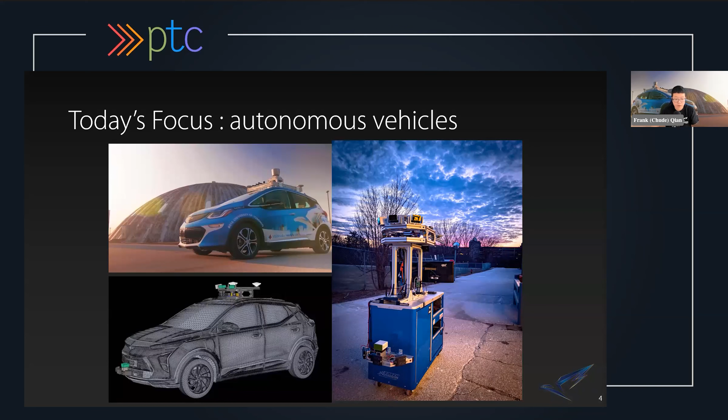So some of the demonstrations are basically based on Waymo's publicly available resources. With that being said, I'd like to talk a little bit about today's agenda. We did the introduction just now, and next I'm going to talk about autonomous vehicles' history, the definition of autonomous vehicles, and some modern day examples of autonomous vehicles.

And then I'll mainly focus a little bit on talking about autonomous vehicle sensing technology - the sensors on the autonomous vehicle. I'll try to touch a little bit on autonomous vehicle software system architecture and the software components, although certain areas do have a slightly higher technical background needed to understand, but I'll try to explain it as much as I can without involving math in the conversation.

And then lastly, I'll talk about where are we in this process, where you'll see so many companies trying to get to level 4 autonomy, and some of them might claim that they have quote unquote full self-driving. So we'll talk a little bit about where we actually are from an academia standpoint in this process.

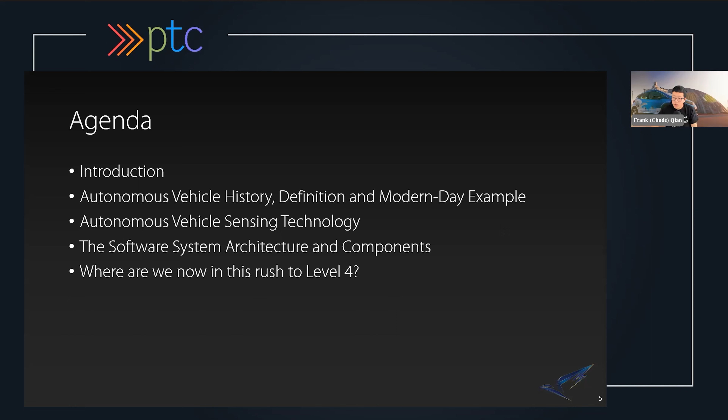So with that being said, let's start with talking a little bit about autonomous vehicles - the history, the definition, and examples.

So in contrary to most people's understanding, autonomous vehicles actually started way back in the early 1980s, where there were a couple of industry pioneers that sort of started the process of developing hands-off autonomous vehicle systems. Namely, in the 1980s, Carnegie Mellon University developed a vehicle platform called NavLab, which is the leftmost vehicle. It's modified from, I think, a minivan. The vehicle actually performed only one task at the time, and it was already a huge groundbreaker.

What it does is basically keep the vehicle within the two lanes - that's all it does. Compared to modern day technology, if you've bought a car in recent years, it's sold with the feature of lane keep assist, basically. And it's also, if I recall correctly, a single agent system.

What that means is it assumes there's no other road agents such as vehicles or pedestrians. It's only by itself, and all it does is keep within the lane. But mind you, this was in the 1980s, so back then computers were not as powerful as modern day computers.

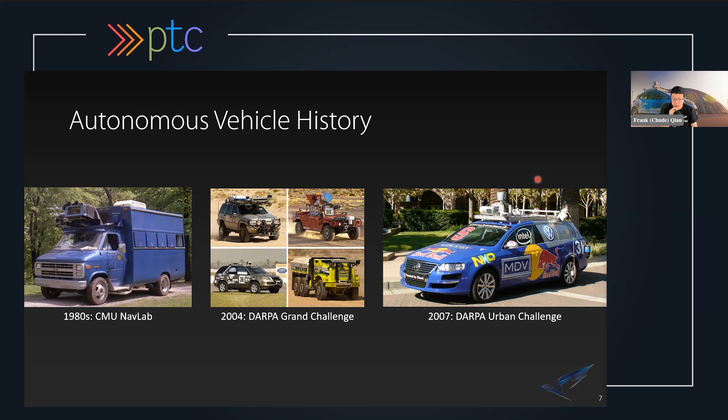That brings us to 2012, where Google Project X started publicly testing their autonomous vehicle project, although development actually started right after the DARPA Urban Challenge. So the DARPA Urban Challenge, in certain people's minds including mine, is sort of the ground zero of modern day autonomous vehicle development. And in 2018, Waymo becomes the first company among a few others to start publicly testing the concept of an autonomous rideshare system in certain areas.

This operates under an operation design domain - I'll talk about that concept a little bit later. But in a specific area, I think Phoenix, Arizona, they tested their systems and allowed users to ride in their vehicles with a safety driver in the seat.

In the same year, something super unfortunate happened in the US, which is the first fatality accident on a level 4 autonomous vehicle. The vehicle was owned by Uber ATG. This also became a turning point in the discussion, shifting from just building an autonomous vehicle quicker to win the arms race, to more reflection on safety of autonomous vehicles.

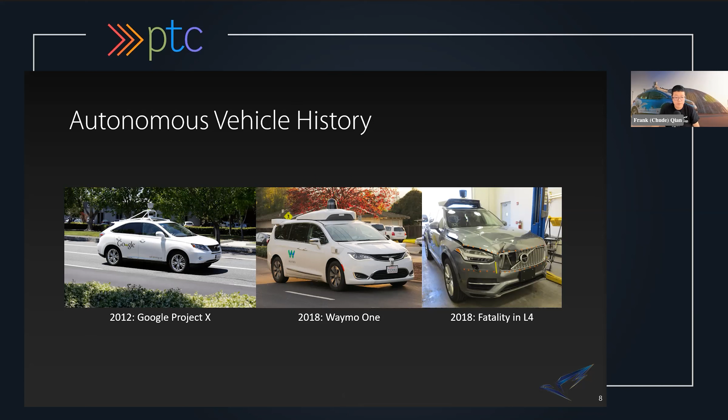So I mentioned the term level 4. This level is actually a definition of autonomous vehicle autonomy by SAE International. I think it's a Society of Automotive Engineers, which is like a governing organization on automotive engineering. So they define 6 levels of autonomy in a vehicle.

For level 0 to level 2, on a very high level summary, as a driver you still need to pay 100% attention on the road, and you have to constantly supervise the vehicle. You cannot zone out, or I would say not drive the car for a prolonged period. The car in level 2 might have features such as providing steering and brake/acceleration support, such as following in a traffic jam with stop-and-go features, or lane centering features which keep your car in the center of the lane.

So a keyword you might hear if you buy a vehicle recently, for an add-on feature, is called adaptive cruise control. Level 2 is also very popular these days. Most auto manufacturers, such as Toyota, Volvo, or BMW, claim they have level 2 features, although their performance varies drastically.

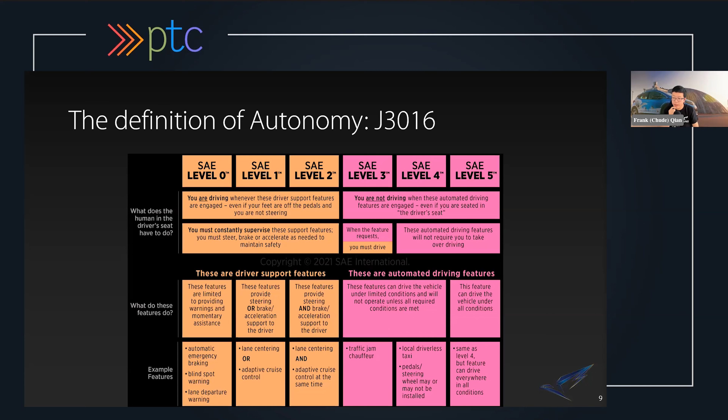Obviously, you cannot just stop on a highway. So the degradation is a broad term for exiting the autonomous vehicle mode. For level 5, the goal everyone is trying to reach, it envisions full autonomy capability, and the conditions bounded for level 4 autonomy are lifted. You can drive, or in other words the car can take you anywhere you want without any hiccups, or even if there's a hiccup, the car can handle it itself. That's the definition of the SAE level of autonomy, the J3016 standard.

For modern day autonomous vehicles, or more specifically modern day autonomous rideshare systems, there are a couple of big players. Waymo, formerly known as Google Project X, was the first to start. They started in Phoenix, Arizona, and I think they have now moved further to San Francisco, California, and a couple other regions for small-scale testing.

Two new players have risen up in recent years: Apollo, a company from China under Baidu, and Cruise under General Motors. Both of them started publicly offering rideshare in a given geographical region earlier this year. If you look very closely, you'll notice the Cruise car is also based on a 2017 Bolt EV, similar to what we have for our Zeus vehicles. So there are a couple of things in common, and a handful of things that are totally different, comparatively speaking.

Another question that has to be addressed when talking about autonomous vehicles is: why autonomous driving? Why would we want to give up the fun, in some people's minds, of driving to autonomy systems? It turns out there are actually multiple studies that back this theory: autonomous driving can further improve road safety. If the implementation is done right, the reaction time for an autonomous vehicle is much faster compared to a human driver. It can also increase productivity.

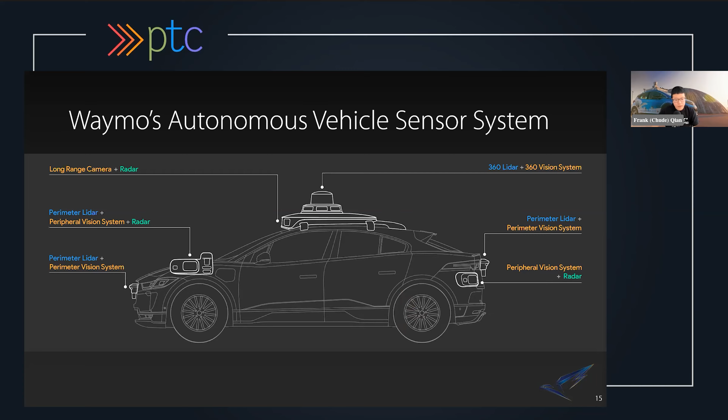So we've seen the impressive one. Let's talk about some of our design. Keep in mind that the vehicle system we design is participating in a challenge similar to the Darpa challenge. It's called SAE Auto Drive Challenge. Basically, 10 universities built their autonomous vehicles, and then we tested at University of Michigan's M-City Proving Ground to validate our vehicle's capability.

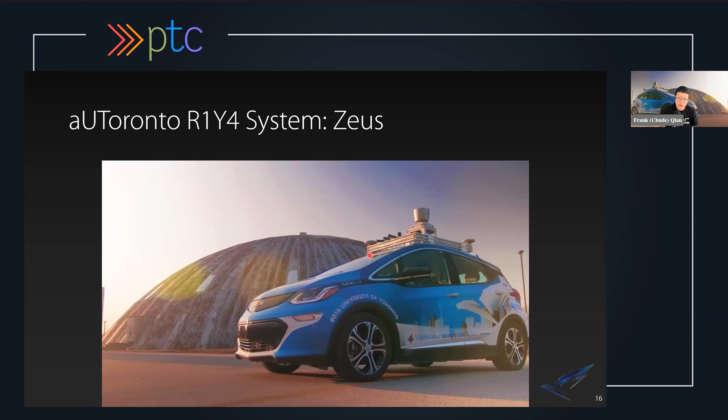It's a subset of a full autonomous driving problem, as you will see in a couple slides later. What we have is only a sensor system on top of the rack. If you pay close attention to the next slide, our sensor system actually mainly focuses on the front. We don't necessarily perform 360-degree surrounding coverage on our vehicle, since the competition is a single agent competition, meaning you're the only one driving on the road, and the interaction of your vehicle compared to other road agents is minimal. So that's how we can get away with our design.

It ties into the discussion of ODD, Operation Design Domain, which I will formally define a bit later in the slides.

So our Zeus vehicle system has an Applanix GNSS INS system, a Velodyne HDL64E Lidar, which for this one, most of the autonomous vehicles you see in 2018, 2019 have that. It's sort of a standard design. And then we have a handful of cameras providing coverage there. Note that we actually don't use radar on this version of the design.

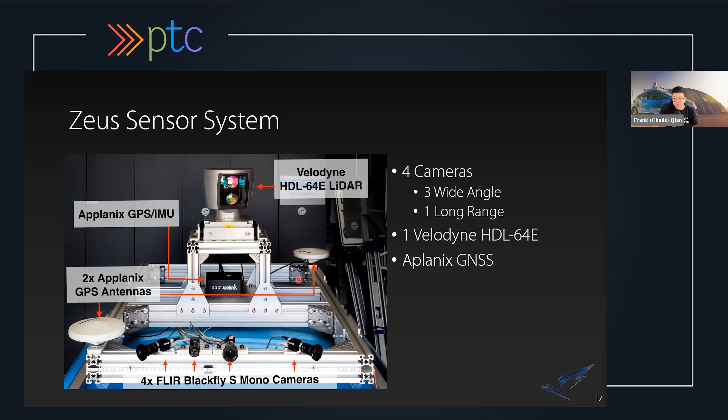Fast forward to this year - this competition runs on a 4-year per round cycle. So this year marks a new round of the competition, and there are some new rules implemented. For lidars, we have to use Cepton's micro motion technology lidar, so we no longer use a giant 360-degree lidar. This is our test and validation system we designed over the past year, and it has achieved very good results for the competition.

The system utilizes 3 lidars on top to provide similar coverage looking in front of the vehicle, the same GNSS INS unit on the rooftop, and a similar but more compact configuration with 4 cameras - 3 wide angle and 1 long range. For our radar, we have 3 radars providing coverage on the bumper area, since you don't necessarily have to mount your radar very high, at least for the brand we got. We also put another additional lidar on the bumper to again minimize the blind spot.

Keep in mind that this design is also under budget, and what we are doing here is a minimal viable design - basically a design system with the smallest amount of money that can provide the maximum performance. So this is what we had for this year. It's not on the autonomous vehicle or a car, it's just on a push cart as a test platform.

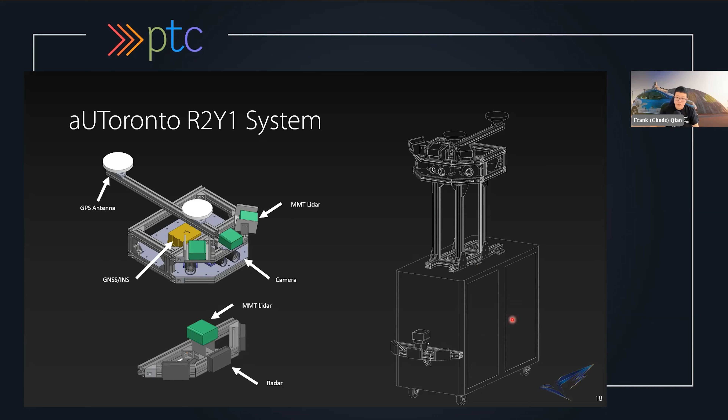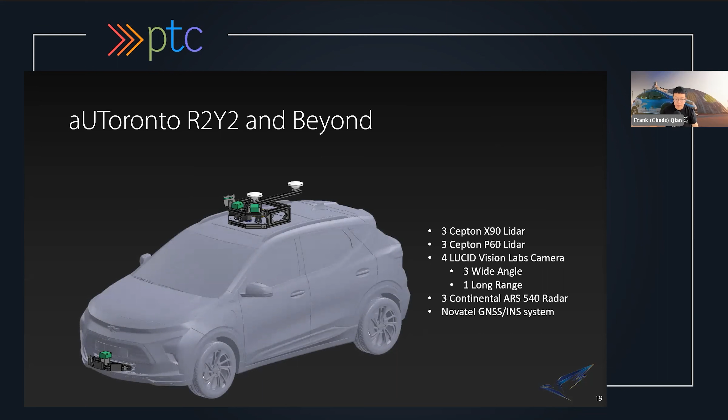So what are we going to do next? This is actually probably one of the first times we've shown this publicly. This is our design for next year's competition, where we'll feature more lidars to provide more coverage and minimize more blind spots. We'll use 6 lidars in total, 4 cameras, 3 radars, plus a GNSS INS system on the vehicle to provide about a full 180-degree coverage in the front. If you look at the two slides, you can see the design is pretty much transferable.

Let's take a look at the sensing technologies one by one. Most of you probably already know what cameras look like. You can actually see objects and recognize what they are very easily through a camera. The technology is very mature.

So with cameras, you're able to tell what an object is or what type of object it is very easily. However, you cannot easily tell how far away an object is from you, because it's a sort of 2-dimensional sensing technology.

Obviously, Tesla has more cameras, more data. So you can, technically speaking, infer depth out of the cameras, but you have to have a large amount of data samples as they do. That's a different discussion in academia where it's called monocular depth estimation.

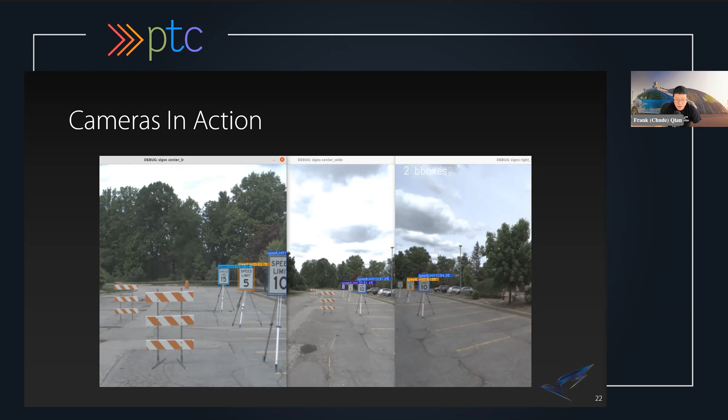Back then, a very popular modality of LiDAR is called a spinning LiDAR - there wasn't an actual academia name, it's just what we previously used. I usually call them spinning LiDAR, which involves a mechanical component that spins around. How LiDAR works is basically it shoots out a laser that gets bounced by a movable mirror, so you can change the reflection where you want it to shoot toward. It shoots on an object, and then the laser returns back to the mirror and onto a receiver. Through how long you shoot out this laser beam, and how long it took to travel and bounce back to the receiver, you can very easily tell how far away an object is, and that becomes a point on a point cloud.

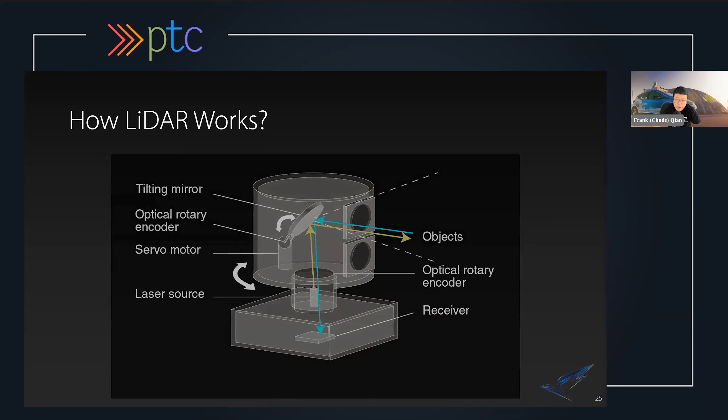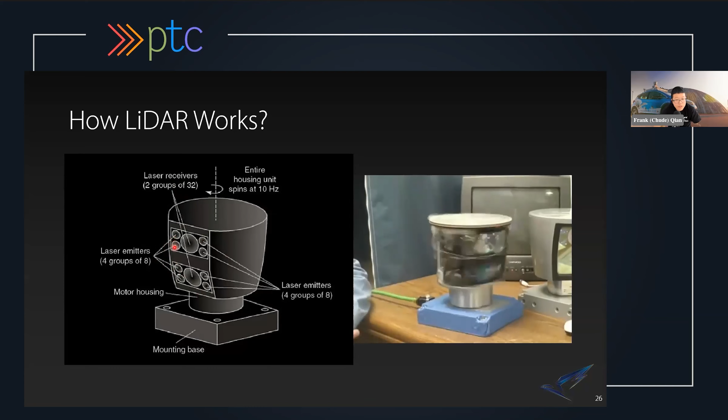So this is another example of LiDAR on my virtual background, you can see there. This is how a Velodyne 64 LiDAR works. It's actually quite an engineering marvel. As you can see, it basically spins to provide 360 degrees surround view. It uses 4 groups of 8 laser emitters and 2 large receivers to receive the points, and it spins on top of the vehicle, providing 360 degree LiDAR coverage. This was for a long period of time the standardized industry standard for LiDARs.

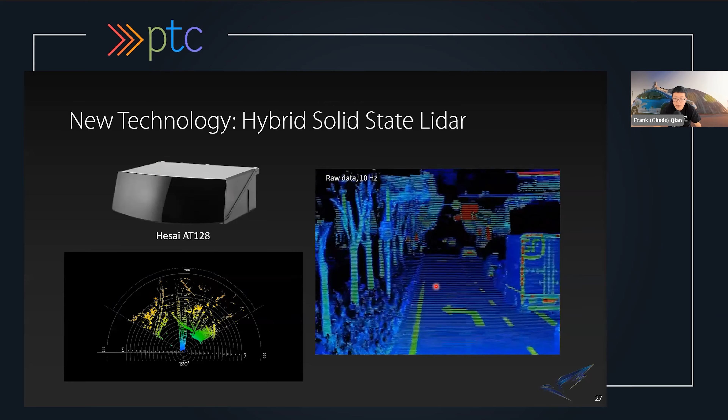However, as you can probably tell, there's a lot of moving mechanical components involved in these LiDARs. So more modern day LiDAR systems involve something called solid state LiDAR. A very popular brand these days is Hesai's AT128 LiDAR. In fact, a couple of car manufacturers already integrated their LiDAR system onto the vehicle, so it's one singular unit. What they have is a MEMS chip to shoot out the laser and receive it, so there are no more major mechanical moving parts that can fatigue over a long period of time. It's more preferred by automotive applications.

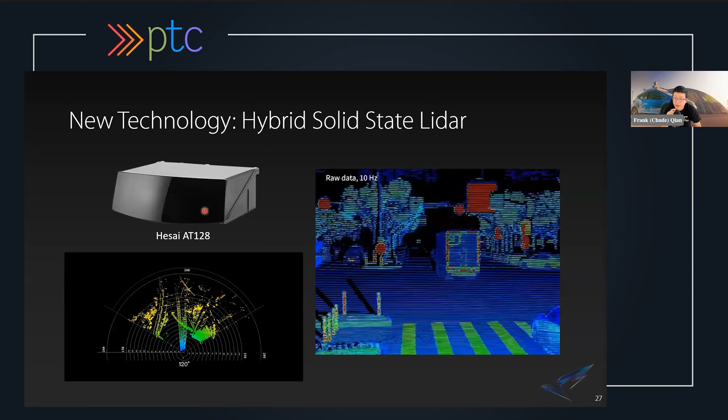For us, what we use this year is a different LiDAR technology called micromirror technology, in which the LiDAR has some mirrors inside that vibrate. You can see it produces decent enough coverage for objects, but it has this very interesting grid-like pattern. That's a very unique characteristic of micromirror technology, at least in this day and age, by Hesai.

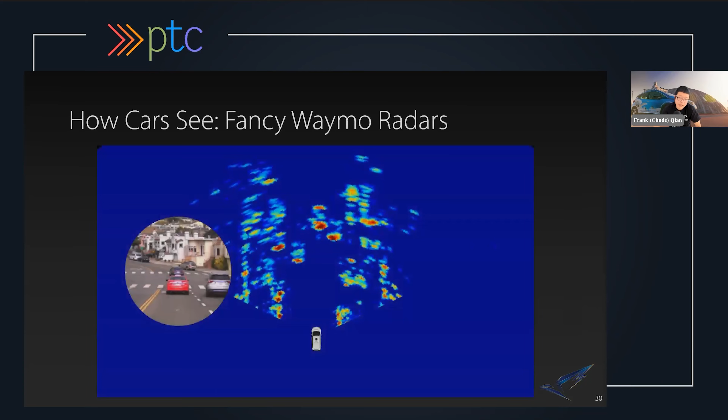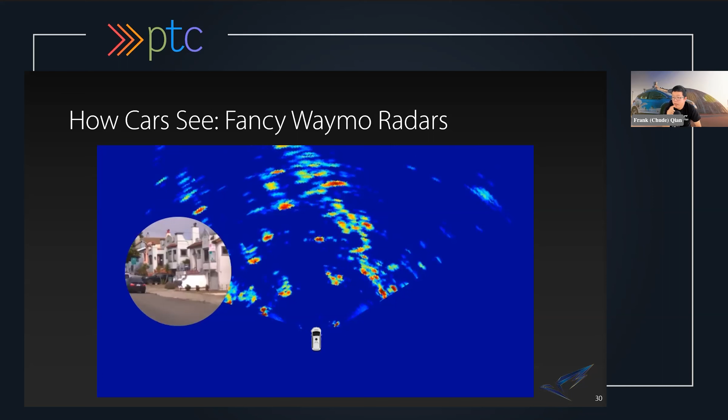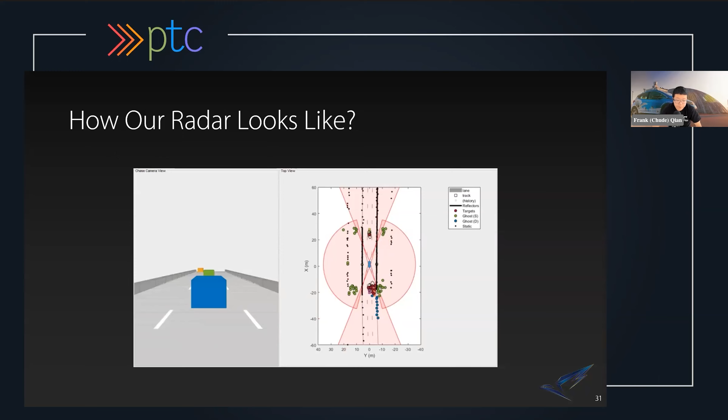With radar, the advantage is that you get back the object's velocity directly alongside their position information. Each of these dots actually contains velocity information that you can read on our radar system. So how does that work? It's actually very deep mathematics, but you can very easily understand it.

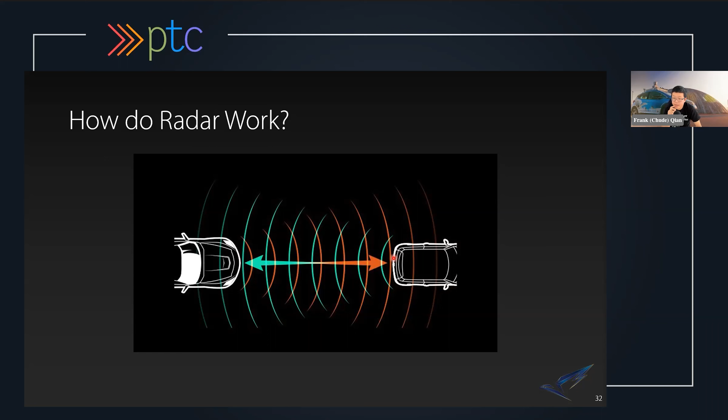You shoot out, similar to LiDAR, a radar 77 gigahertz beam, and when it hits an object, it bounces back. However, if an object is moving, the frequency will change, and through that frequency shift, the Doppler effect, you can infer the vehicle's velocity. Think of it like standing on a street when a police car with sirens drives fast next to you - you'll hear the tone shift a little bit. That's basically, on a very rudimentary level, the similar idea of how automotive radar gets velocity information. It looks at the frequency shift.

So for some of you, if you follow technology, those are very standardized sensing technologies that has been out there since early 2014, 2013 even. Next, I'll show you a little bit of the bleeding edge technology of the sensors.

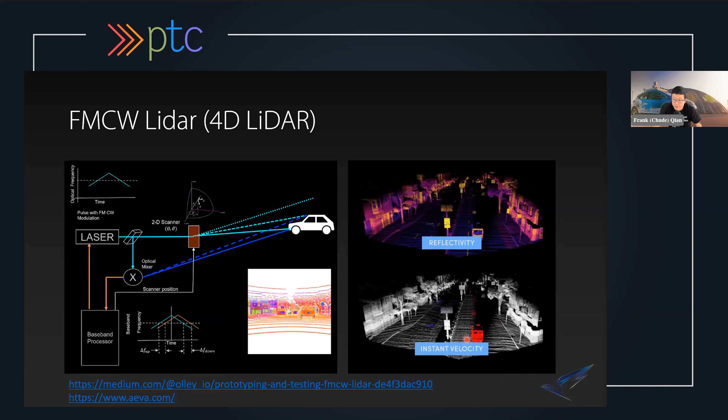So why don't we combine the two? It turns out you can actually also use laser to look at a very broad scope of frequency shift in the laser space, and you're able to get both the good point clouds as well as the velocity information of each point, which is super nice.

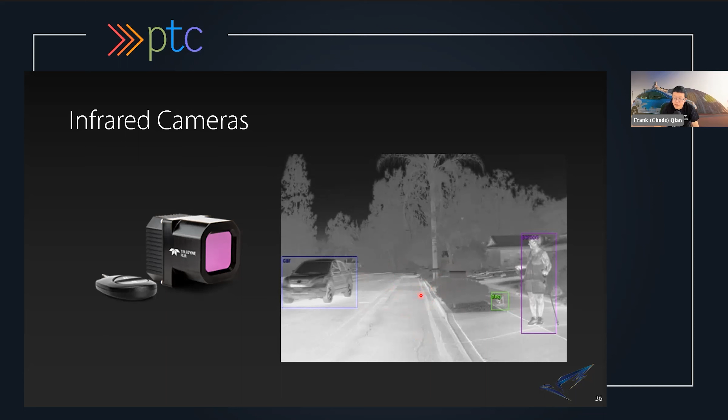Another technology that hasn't really been put onto autonomous vehicles due to import and export restrictions is infrared cameras, because the military still uses some of these technologies. But it also allows you to see objects very well at night, especially handling animals that jump out at the side of the road. So we're hopeful that this technology can get opened up a little bit more, and more vehicles can have that.

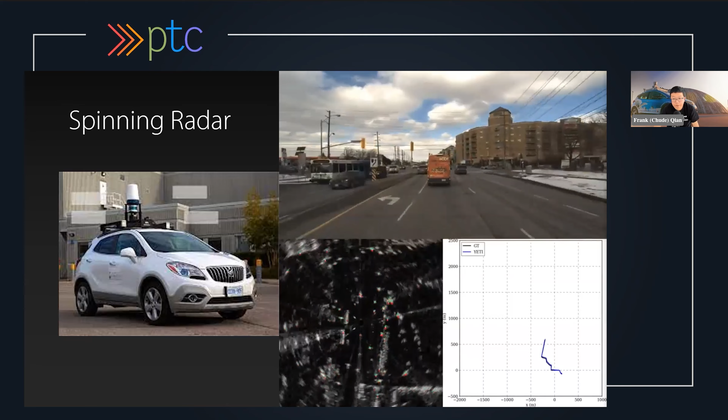So when talking about designing a sensor suite for an autonomous vehicle, another very important aspect you need to think about is sensor coverage. Waymo has full 360 coverage, nooks and crannies around the vehicle. For our vehicle, Zeus, we have 360-degree coverage introduced by Lidar. Our camera only covers the front 180. We did attempt to put radar on there, but eventually we didn't use that.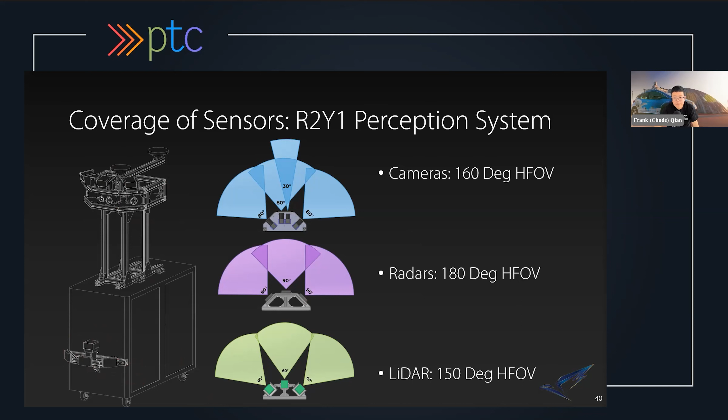So how can we get away with only having that little sensor compared to Waymo's design? Well, I have to introduce the concept of operation design domain. Basically, operation design domain defines a set of operation areas that your vehicle is expected to handle and operate in. For our scenario, it's very simple.

It's based on whatever the competition gives us. All we need to do is drive within the lane, detect traffic lights, handle pedestrians crossing the crosswalk—there's only one pedestrian expected at a given time—and handle deer jumping out onto the road in front of our vehicle. So that is our operation design domain.

And in here, you can see, as I previously mentioned, that for actual autonomous vehicle companies, there's also a geographical fence idea where Phoenix, Arizona was the first area validated because it's most likely always sunny there. Although Waymo nowadays has also expanded their weather coverage to pretty much everything, a safe approach is to define your operation design domain and then validate it rigorously, and then slowly expand your operation domain.

So that's why we get away with what we have, and that's a very important concept in autonomous vehicles. In the upcoming years, you will see cars selling autonomous driving features, but they only support certain areas of a geographical region, bounded by the operation design domain. Some cars might not work under rainy weather or snowy weather. So that's a very important thing to look out for.

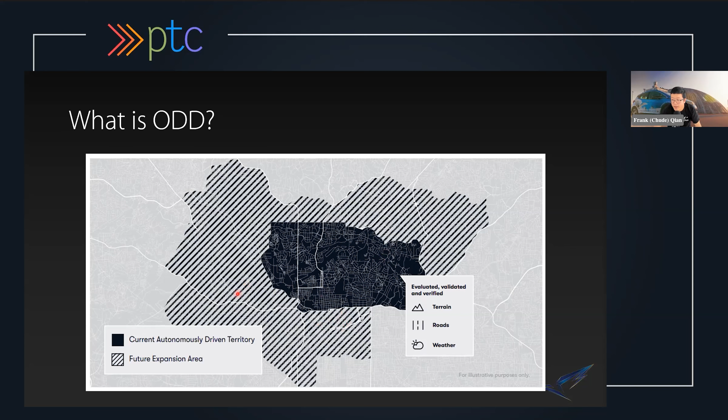Next, let's talk a little bit about designing the system architecture of an autonomous vehicle, or what I call an old school autonomous vehicle. These are the components in it.

Modern day autonomous vehicles are more complex or have more variations, such as machine learning end-to-end. That's what Tesla does. Or some more rigorous component-level machine learning that basically treats the system as a black box.

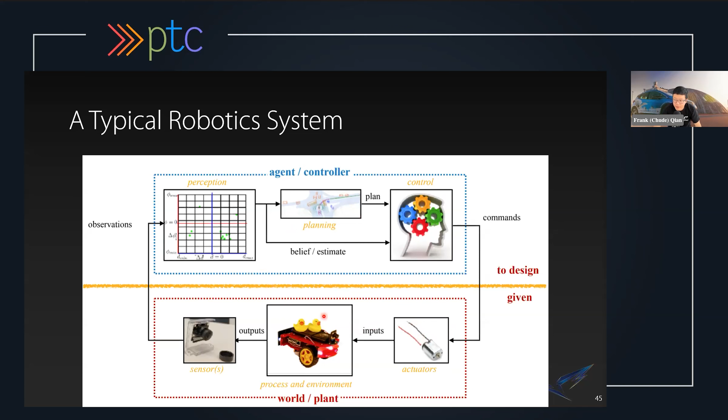A very basic robotics system can be defined as follows: you have a world or a plant, you have your sensors on your vehicle, you have your actual vehicle, and you have the actuators or motors or execution components. Your sensors look at the world and do something called perception, perceiving the world. From the outcome of the perception, you make a plan. You hand it over to control, and control executes the plan, and rinse and repeat.

Here's a high-level summary of our autonomous vehicle system architecture for perception that we designed this year. Our camera is only responsible for telling if an object is an object and what type of object it is. For example, the camera only tells, hey, this is a sign, hey, this is a barrel, hey, this is a car. Our LiDAR only tells, hey, I've seen something at this position. And our radar is responsible for telling, hey, I see something at this position with this velocity, roughly. Then it's all up to our sensor fusion component to mix the sensor information together and produce a proper perception.

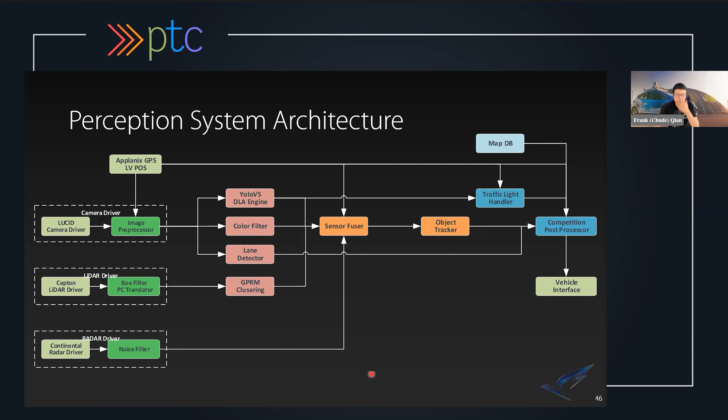For all these components to talk to each other, we use something called ROS, Robot Operating System, as our communication middleware. How can we have sensors talk to each other? It turns out ROS provides a very good communication layer for our components to talk to each other. If you're interested in going into the robotics world in the future and want to learn programming skills or basic knowledge, ROS is basically something you'll definitely cross paths with if you go to a university or college to learn robotics. So if you're interested, I urge you to practice using ROS components, simulators, and robots.

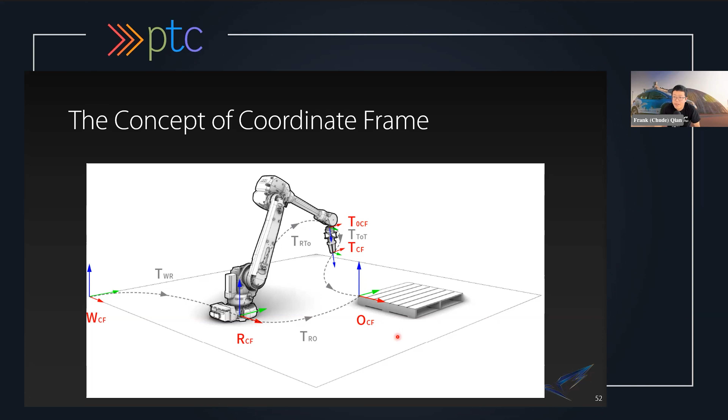Another very important aspect we need to talk about is the coordinate frame. Different sensors have different perspectives. Imagine you're standing in a room facing slightly different than another person in the room—things at your 3 o'clock direction might be at someone else's 4 o'clock direction, even though it's the same thing, just because you're standing at a different place facing differently. That's coordinate frame in a nutshell. There's plenty of linear algebra and matrices involved if you want to drill deep, but for the interest of time, we're not going into that.

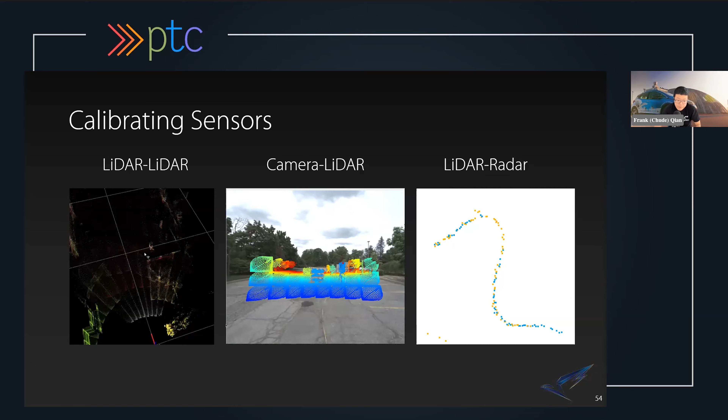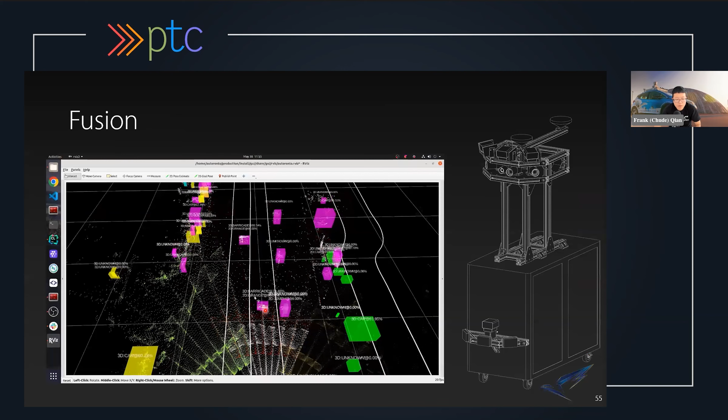It's actually quite fun—you have someone running in front of the sensor system in a weird S-shaped trajectory. Since it's the same object, both sensor systems, LiDAR and radar, should have this trajectory described for that same object. From that, we're able to pass the information onto each other and provide it in a unified, uniform descriptor.

More visually illustrating this: this is me walking in front of our LiDAR with our camera. You can see our camera sees me, and our LiDAR also sees me—that's sensor fusion in a nutshell. Then there's a human standing there—this is the LiDAR, and you can see the human gets picked up in the pattern, so you can lay the points on the human.

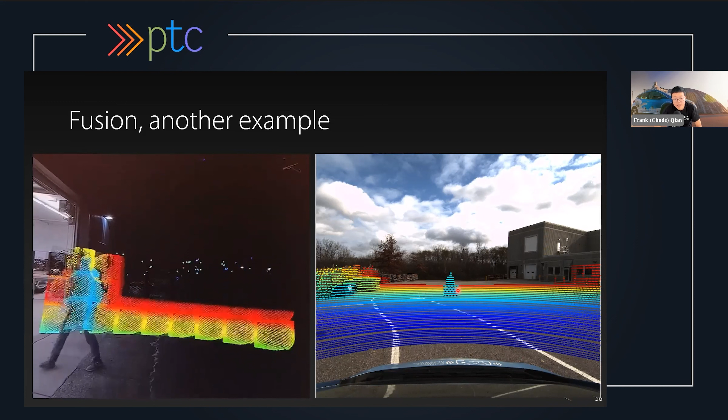Once you have that information, through some very fancy math—actually technology that dates back to the 1980s—you can basically track the object. You can see each object has its own little unique identifier number. So yeah, that's the perception system in a nutshell.

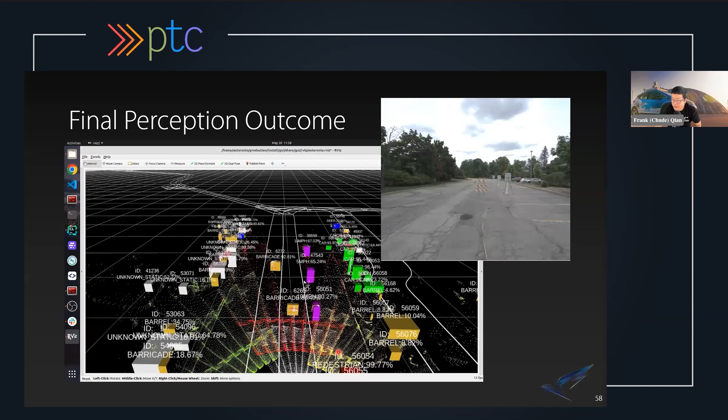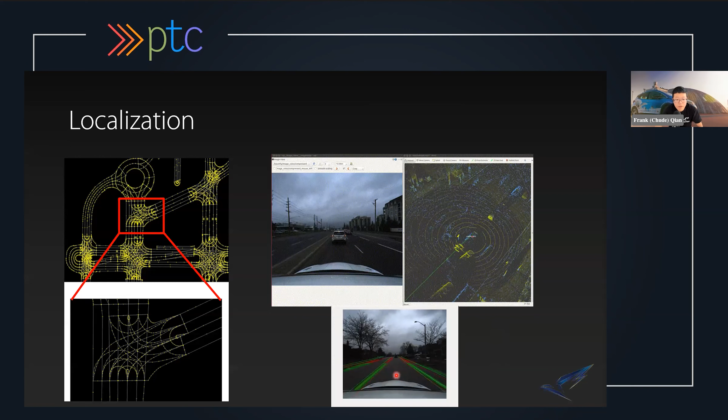This is another localization method. It turns out you can use GPS and a map, similar to how us humans do it, or you can use LiDAR to do localization through the method I previously mentioned, similar to the ICP idea—you have a point cloud you try to match, which gives you a description of where you are. Or you can abstract it even further and just use lane markings instead of the full point cloud.

Next, I'll talk a little bit about the planning aspect of things. So in a nutshell, planning can be dissected into 3 problems. You have a global planner. The global planner's responsibility is to tell you how to go from A to B.

A local planner, however, is more specific to the local segment of the lane. For example, if you're driving on road A, but then suddenly there's an obstacle on road A that partially blocks the road, as illustrated on the right example, so you have to drive around it. That's a local planner's responsibility.

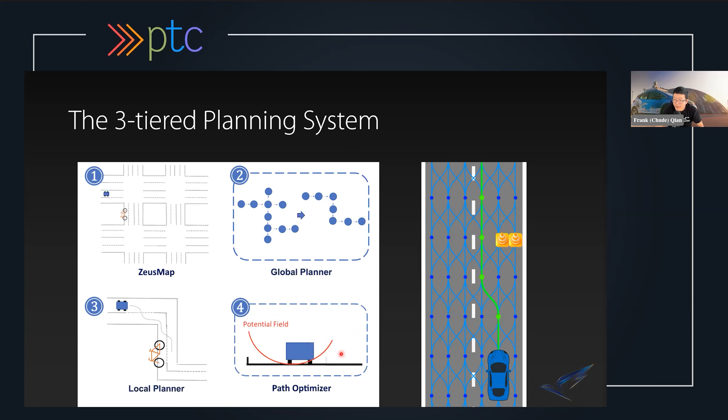And then finally, for an autonomous vehicle, you also want your vehicle's trajectory, which describes how it drives around, to be smooth and comfortable. Obviously, you don't want to sit in a car being driven like a roller coaster. So you also add a velocity profile generator and a path optimizer to basically make your car comfortable to ride.

And then this is a quick demonstration of our planning system from round 1. We haven't built our new planner yet, so this is how we manipulate a parking maneuver. You can see the proposed trajectory is actually very, very smooth here.

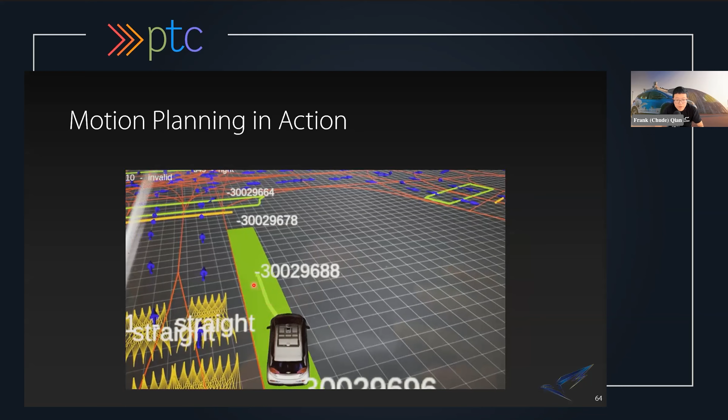And then with all these put together, you get to have an autonomous vehicle.

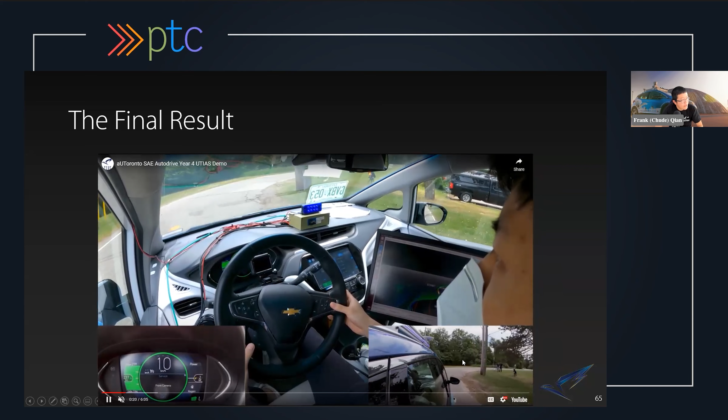So as you can see here, I'll just show you a couple examples. It's going through a corner, so you can see how we maintain the speed of the vehicle. But then also, you can see we keep on road, and the driver there is just for safety purposes in case the car goes wrong.

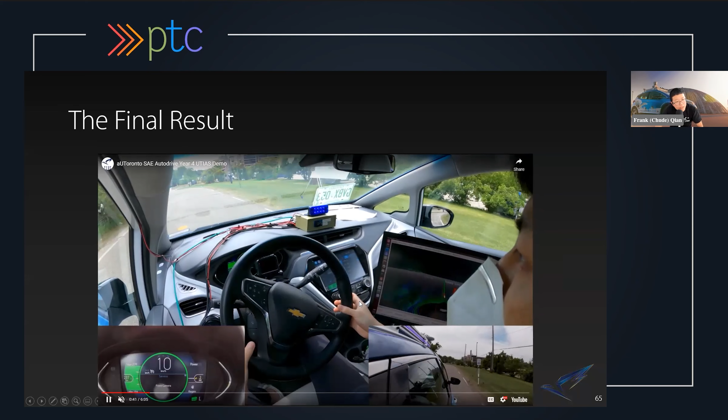And then here we hit a 20 miles per hour speed limit. So obviously you don't want to be the person holding up traffic, so you can see our vehicle speeds up accordingly.

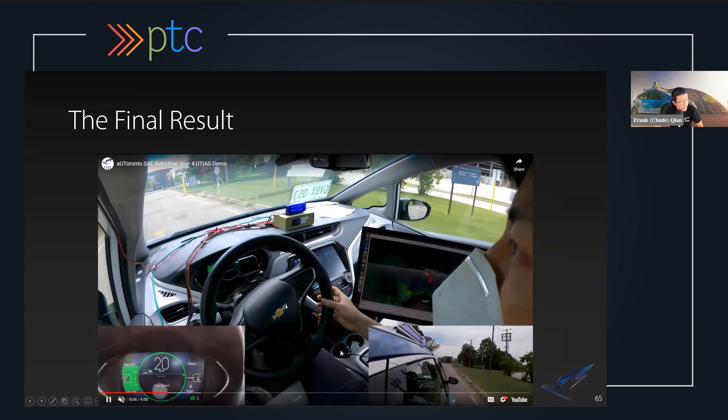And then the road is a little bit swervy here, so it goes around. And then it reduces speed since there's a speed sign of speed limit 15. You can see it actually starts braking even before it hits the point. Once it hits the speed limit sign, it goes according to the speed limit.

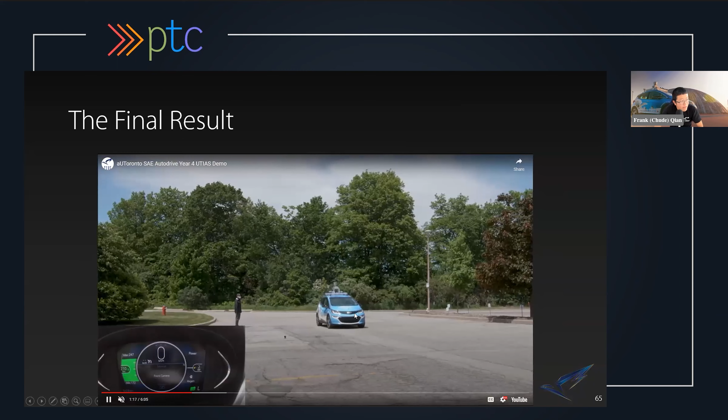So here it illustrates our Year 4's final vehicle's pickup and drop off. Due to COVID back then, we can't have 2 people in the same car, so this is just a demonstration.

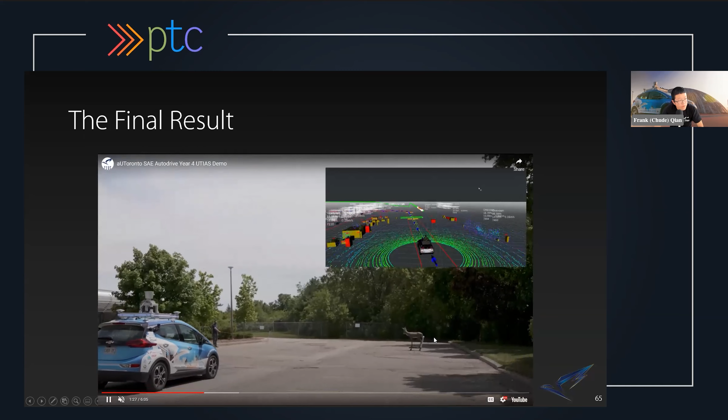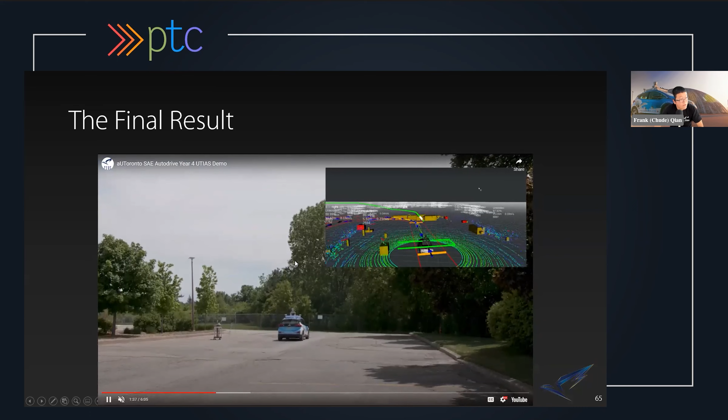Now the cool part is once the car drives further, there's a deer right there that will sort of jump out of the road. You can see our system actually recognizes that's a deer that has a velocity, so it expects it to jump up and sort of takes the maneuver ahead of time. Here's another example, so you can see the car sort of misses the deer.

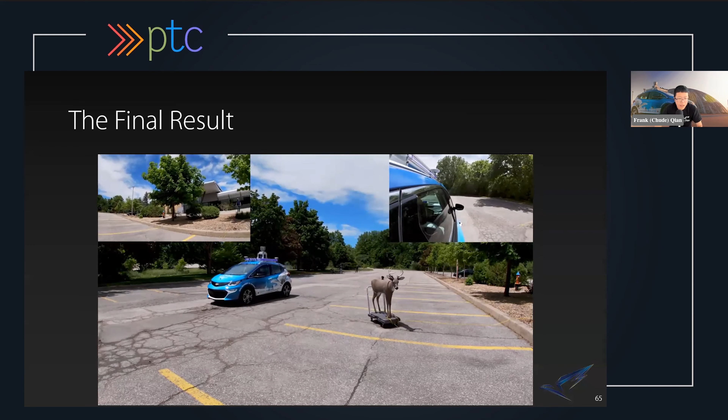So that's our system. Let's talk a little bit about where we are now. There are 3 main problems in my mind of autonomous vehicles nowadays.

One is most modern autonomous vehicles are built sort of scenario by scenario. So if you've seen a scenario that you have not seen, you add it into the scenario bank, and hopefully your system will learn how to adapt to it. But we all know there are infinite possibilities in the world. So how do you solve that problem?

Another thing is adversarial weather. This is another main reason why autonomous vehicles haven't been tested in Toronto, but most of them are developed in sunny California or sunny Arizona, because there's no rain, the sun is super bright, and the road is pretty well painted. But in Toronto, it's quite challenging actually. U of T has a research group, actually my affiliated research lab, starting the WinTOR project, which hopefully can bring autonomous vehicles into Toronto and Canada.

And then another thing is proof of safety. Since 2018, Uber ATG's incident, safety has been a highly emphasized area that people cannot overlook. And then lastly, with safety, with scenarios, how do we sort of introduce public perception and public acceptability? Some people will lose their job because autonomous vehicles are a thing. How do we convince those people these are the better changes?

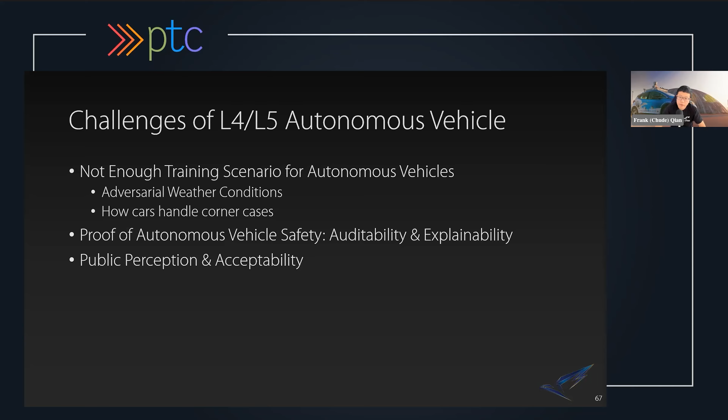So this is from our mechanical engineer. This is our proposed sensor wiping system, as you can see there. So are these systems effective for our vehicle system?

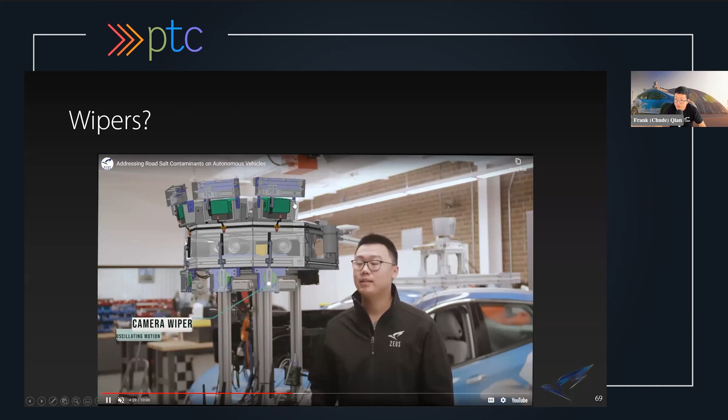Another thing is nighttime driving. This is what the discussion on Tesla is mainly on. Cameras don't necessarily see well at nighttime unless you custom build some imaging sensor that handles that. So having multiple sensors is definitely a plus, ensuring more safety for autonomous driving.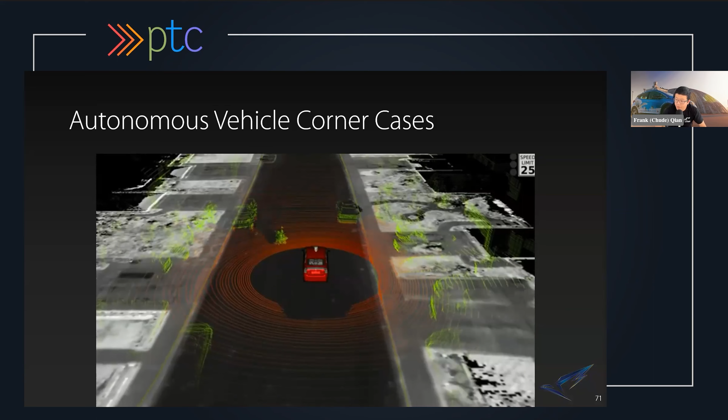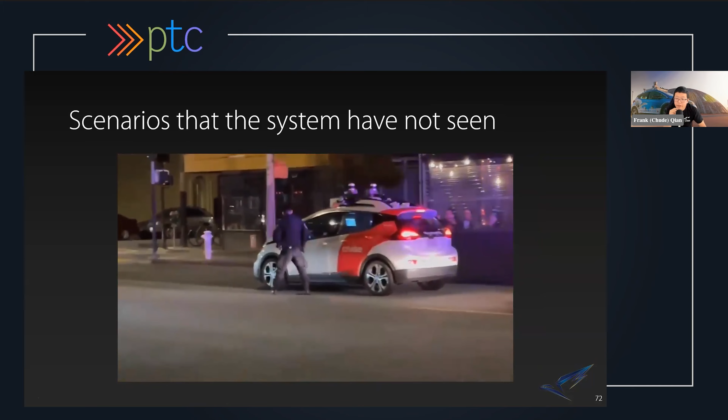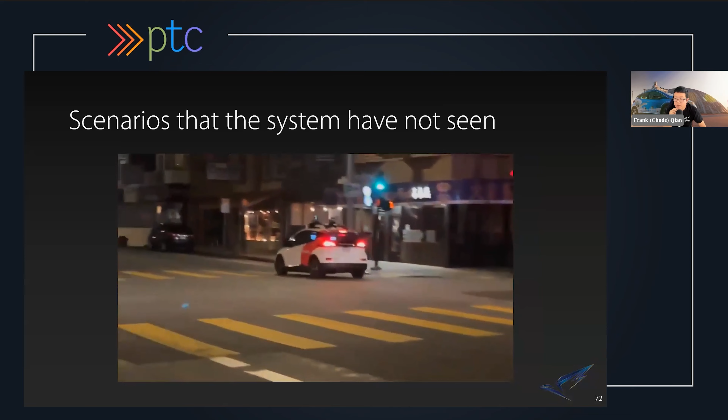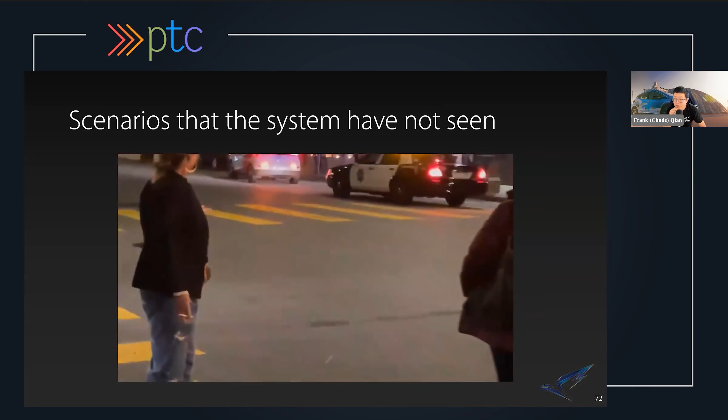Here's another very funny video. How do autonomous vehicles handle a police pullover? Well, it turns out it can't right now. As you can see, this is a scenario where the autonomous vehicle just literally evades the police stop, and the policemen have no clue why the car is driving by itself with no driver in it. So both public perception and corner cases like these, how do you handle a police stop where the police are just doing human being things that are non-predictable?

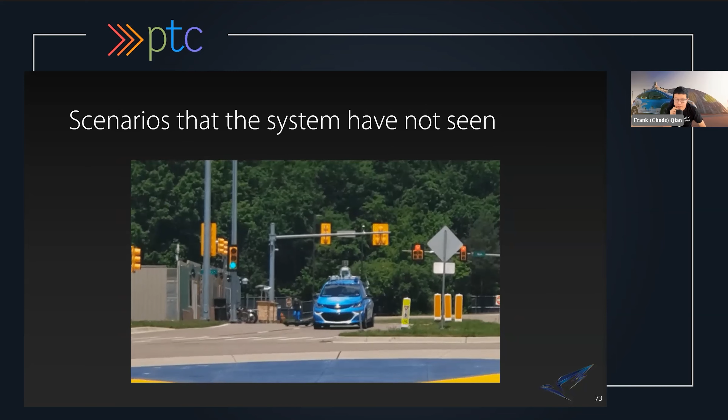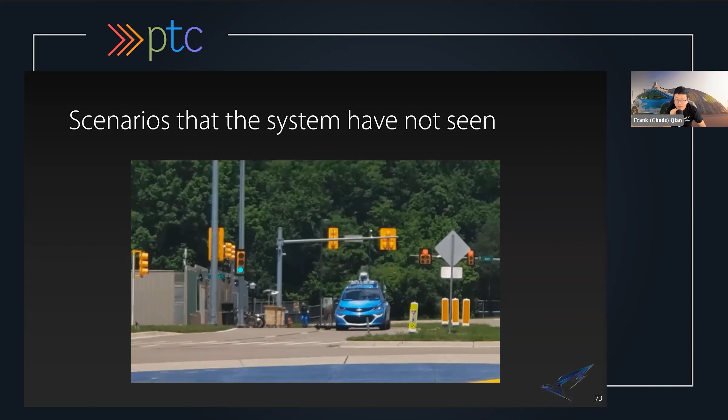This happened to our vehicle: how do you handle animals running in front of vehicles? Technically speaking it's not our fault, but we could have done better. We could have stopped earlier once we saw there was a deer, or we could have gone faster and not hit it.

It turns out a modern day solution is you build a simulator and let the car and agents interact with each other, kind of like the TV series from the early 2010s called Person of Interest, where you build a huge automated scenario generator. What you're seeing here is one of the scenario generators we built that randomizes the scene. In one scene, a car might jump out; in another, a deer might jump out; and lastly, you see a pedestrian jump out in front, and our car needs to handle it.

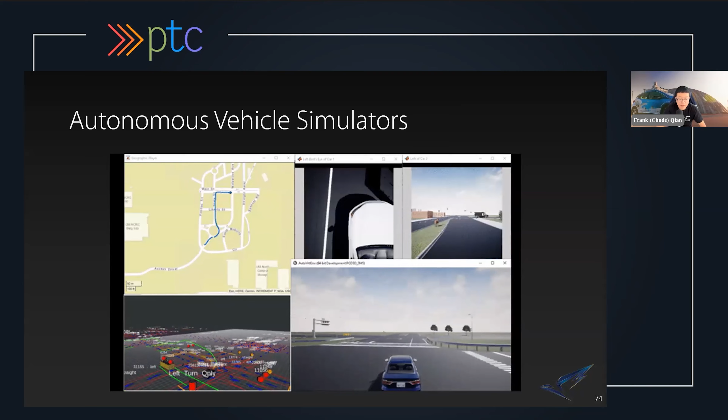For bigger companies such as Waymo, they're obviously going to be more fancy. They have learned AI agents, similar to those you play against in Grand Theft Auto, but now they're actually more human-like. You put your car into those agents and let them interact with each other and see what comes out.

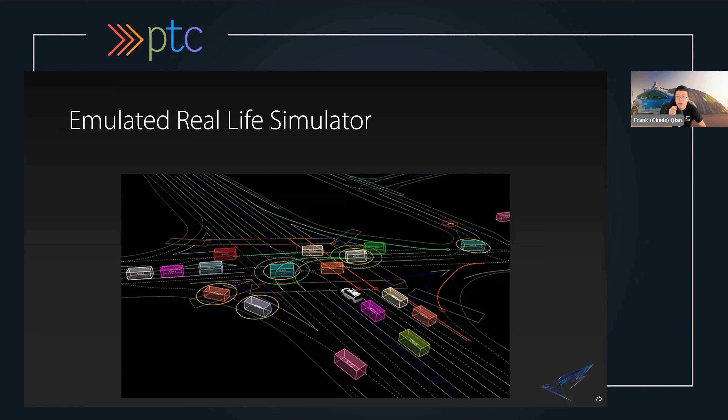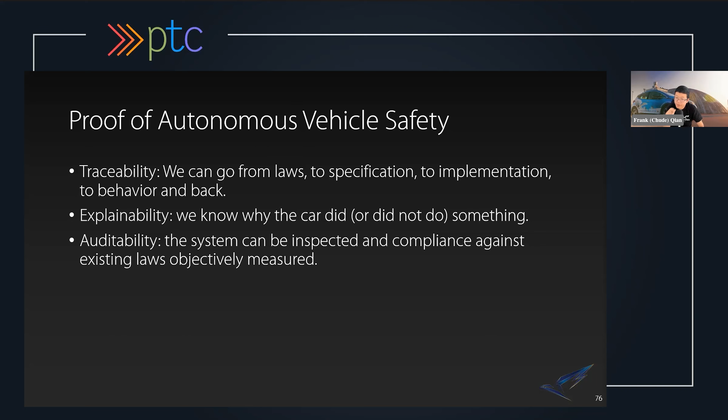With that being said, some closing remarks. I know the audience is mainly high school students, and I think there are also some undergrads on the call.

There's still quite a large amount of work to be done in the field of autonomous vehicles, addressing the discussion of generalization. Don't just look at what Waymo has done and think autonomous vehicles are already there, or look at what Tesla's PR has said. It's actually farther off than what's commonly perceived, if you factor in the discussion about safety and generalization. So I encourage everyone, if you want to pursue robotics or more specifically autonomous vehicles, to always keep in mind you're building an engineering product that's going to have an impact on thousands of people's lives. Safety should always be your first priority when you design a system, and also learn good math, because you'll have to use it for almost everything.